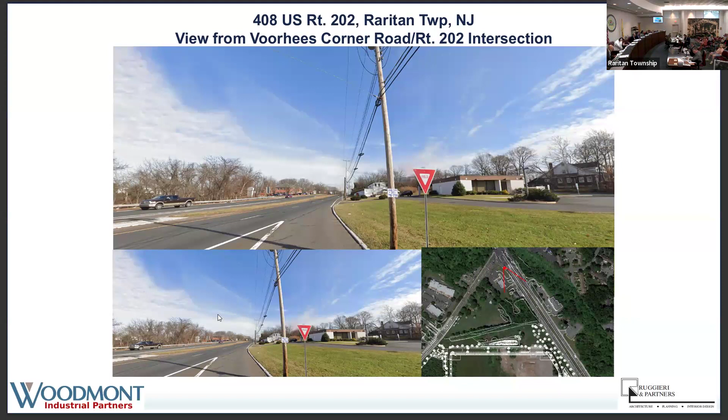You'll turn the page. The next image is the main entrance on 202 looking south. You can see the building here as you come down. And then we have the images on the next two pages from Voorhees Corner Road.

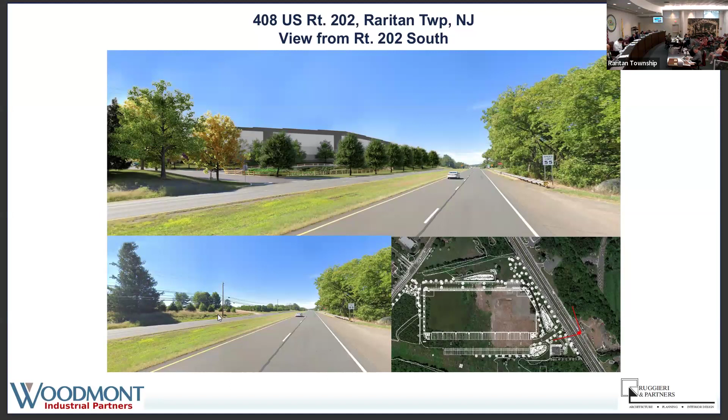This first shot is a shot looking in the emergency access drive. I'm pretty certain if you read the verbiage from the redevelopment plan, the emergency access drive needs to be heavily buffered and bermed, which you can see that we have done here, helping to protect not only the fact that there is any access from here, but also deflects the building image as you drive down Voorhees Corner Road. And I think the last page is really interesting too, because the first page you can see

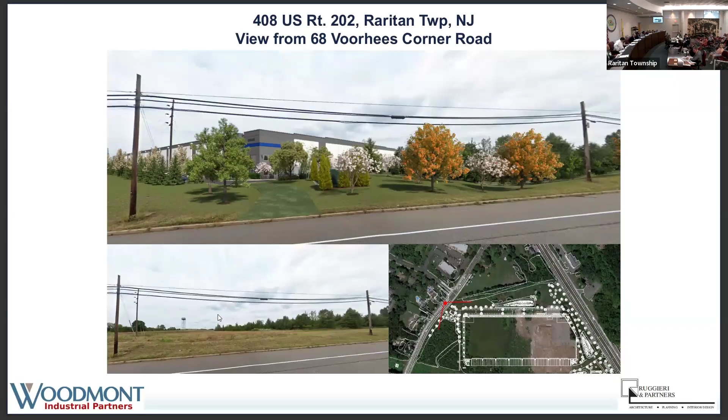68 Voorhees Corner Road. And if you turn the page to the last page of the book, you're just moving a few addresses down to 70-72 Voorhees Corner Road, and you can see the building literally disappearing behind the existing buffer that we're preserving through the acquisition of lot 5.01, which is exactly, I can tell you, what the council intended when they strongly, I'll call it, encouraged us to preserve that property.

That is all I have, Mr. Chairman. I'm happy to answer any questions the board might have.

Just for the record, the reference to council was to the township committee. Correct, yes, I'm sorry.

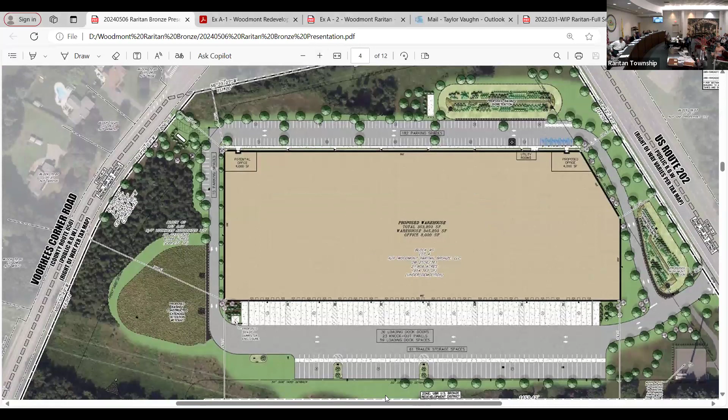The building and a majority of the loading area will come into the proposed constructed wetlands, and that will discharge down into the stream corridor that flows north, away from the Voorhees Corner and 202 intersection. The drainage area I mentioned is 3.5 acres that, under existing conditions, goes towards Voorhees Corner Road. This area now gets cut off and directed down into the constructed wetlands, so the area that comes down into Voorhees Corner is much reduced.

Okay, thanks for the overview. Thanks, Dylan.

Okay, so again, I'd go back to Mr. Darcy's report, because he's got specific questions. Do you want to go through item by item, or is it something else? He wants to go through the stormwater report item by item, going through Mr. Darcy's report, the stormwater section, item by item. Recommend the grading and drainage also, starting with the section before it. Let's start with the stormwater, then we can go to that.

Okay, I agree with you, Michelle. I think page 6 of 10 now. I'm just going to keep this up on the screen for now. Page 6 of 10, number 43.

So it's the bold area. It looks as though a lot of the type is sort of descriptive. It looks as though the bold type is asking for stormwater calculations to be provided. You'll provide those? Yes.

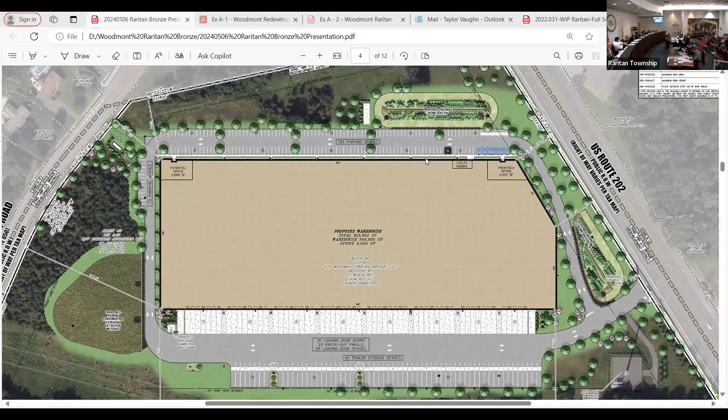Thank you, Mr. Chairman. Okay, on site plan number 16, Mr. Chairman, we will agree with that comment, we will comply. Number 17, we will comply, and we note that the DOT access permit is pending.

Number 18, Bill, I'll ask you to address numbers 18 and 19. We provide the correct number of EV and accessible spaces. Right now, because the applicant is hoping to have one tenant, we set everything up for EV and handicap spaces at the office, which is up in that northwest location. If there are two tenants, we will agree to split and put them over at the other side of the building where we've shown for a potential office.

And number 19, is that you or the architect? Looks like a bit of a tweener. We have a light right next to the dumpster. There's the light set back far enough that the swing of the door should be fine. I don't see any issues with it. If we know there is an issue, we could slide that around a little bit or move the dumpster over. Yeah, I think that's fine.

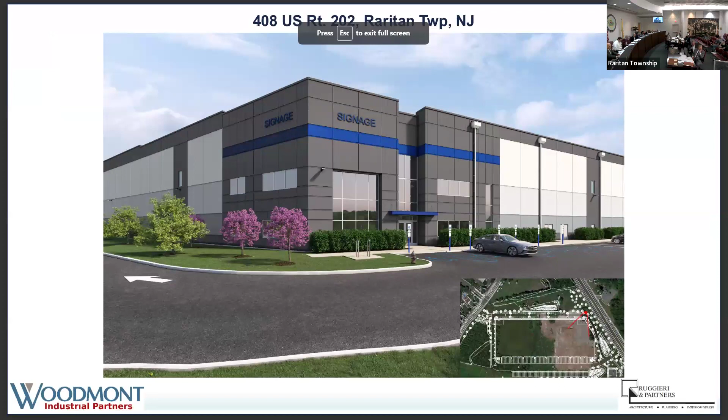These are very helpful to look at. In the right-hand corner you'll see a little red dot and a camera symbol, which indicates where the image is taken from. For example, this one shows the corner of the building.

These buildings are concrete with steel bar joists and rubber membrane roofs, sloped a quarter-inch to drain properly and meet code. Back in the middle of the building, where we have a ridge, the highest point is 47 feet from the floor line. To meet the zoning ordinance, there's a couple of extra feet, so we're saying it's 49 feet — 47 plus 2.

On the end here, on the corners of the building — definitely on one corner, but in this case we did it on two corners — there's fenestration that gives the image of an office building rather than a warehouse. That always works nicely for our tenants. The other thing is this is Woodmont blue — recognize it when you see their buildings. You'll typically see a blue band like that. I bring that up because it's a horizontal band, and when we paint these buildings we create these horizontal paint bands. Psychologically, that reduces the overall perceived height of the building, bringing your mind to horizontality so you don't feel it's as tall as it really is. That always helps.

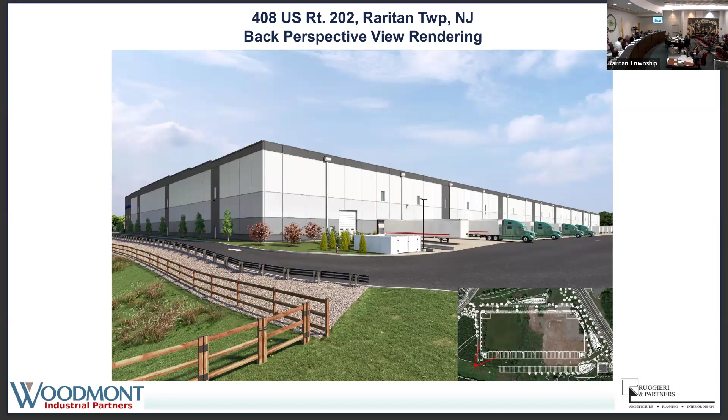How about if we promise to come back with a rendering in different colors that you can take a look at, ones that are softer, more earth tone? Right, yeah, it's just the lines down the parapet there seem pretty dark. When you compare them to the renderings of the street view, it's kind of like a big band that you can see. So maybe if a lighter color was used at the top of the building, it would disappear more.

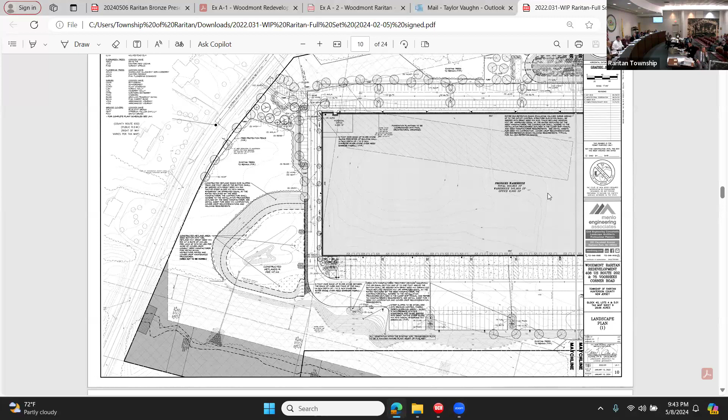As you can see, beyond the basin up to Voorhees Corner Road, we're leaving the existing vegetation that's there. It's mature trees. Beyond that, to the west, where we have the emergency access and the hot box, that's where we're adding in several trees, evergreens around the hot box, and filling it in with some shrubs.

So within that area where the emergency access goes out, does the design include any kind of man-made berm that trees are put on top of, or is it just trees being planted in the graded area with no fill? Yeah, it's pretty much just in the graded area. That emergency access has a little bit of a high point in it, so it does berm up a little bit, but we haven't constructed more because with that emergency access, you don't want it to be too steep if an emergency vehicle has to get in there.

I guess my question is, is there the ability to add some elevation through some mounding of natural earth, to create a berm to try and cut the height off and the visibility from that area?

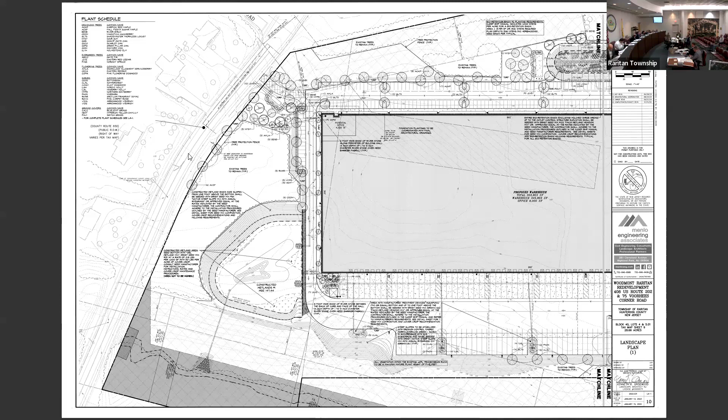Okay, any other questions? Are they complying with all that? Yes. Okay, when do you think you'll have plans ready for review for the relocated emergency access - no, for the relocated access driveway? Perfect, thank you.

Okay, so there being no more questions from the board, is there anybody from the public here who has questions for Mr. Lane? Or even if you want to ask Mr. Morgan Thomas about the landscaping, you could ask him questions as well, since he testified at length.

Marianne Matheson, Bighorn Road in Flemington. Still need you to speak up. Sure, it's Marianne Matheson, Bighorn Road in Flemington. I live on a property that is directly east.

The way we're situated, it looks like the development is about 111 homes, so 400 residents. The way the wind comes out of the west, kind of up at the top of the land. My question is about the noise buffer, if there's air conditioning units or generators — you've addressed the Voorhees Corner Road and 202 side, but we're over by the Case Boulevard side. Will there be any type of landscaping there? I don't even know where the air conditioning units or generators would be as far as sound buffers, because we hear it from JP Case school. We're a little concerned with the lighting and noise, especially if trucks coming in will be facing that development.